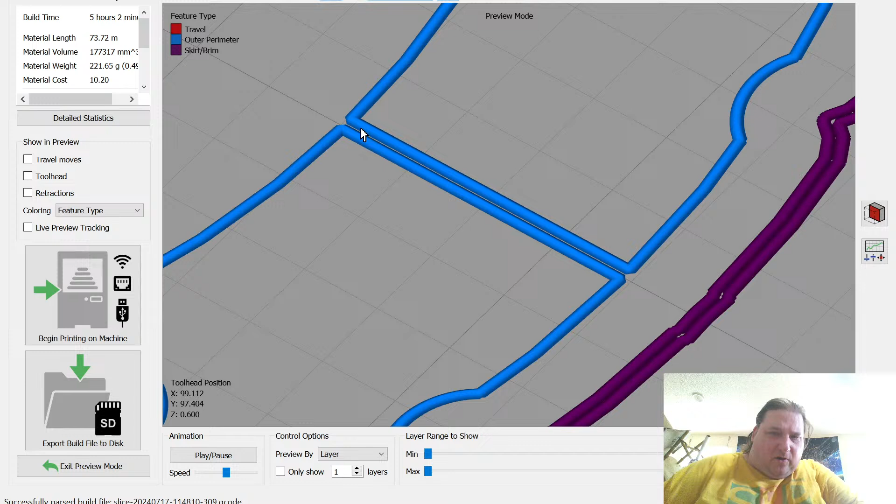Correct. So you can see here, here's my through. Now in the other one, there's a diamond here. And that means instead of all of this surface area bonding, I only had a little tiny bit here and a little tiny bit here. And the result of that is it breaks open like that, which you don't want. So the solution is to put the line in between two diamonds.

Now, the important one is your ribs. Okay, so this is your outer wall, this is your inner wall, and then this is one of the ribs that comes out and attaches. The reason the gaps are critical is because the slicer has to do this. Okay, do you see what it's doing? You're drawing this line here, and then this rib is actually 3 lines. You have the line coming down, the line going across, and then the line going up.

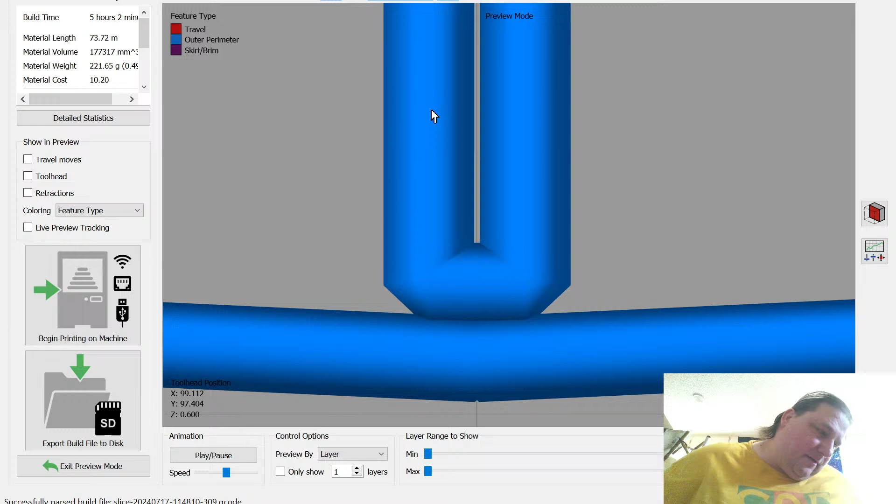You can, but you don't want to do that. That's a one-time solution, and it's a 7-hour print, and you got to test it each time you tweak it like that. And the problem is now, if that part has to mate with another part, well, by adjusting the flow rate, you're essentially adjusting how thick the model is.

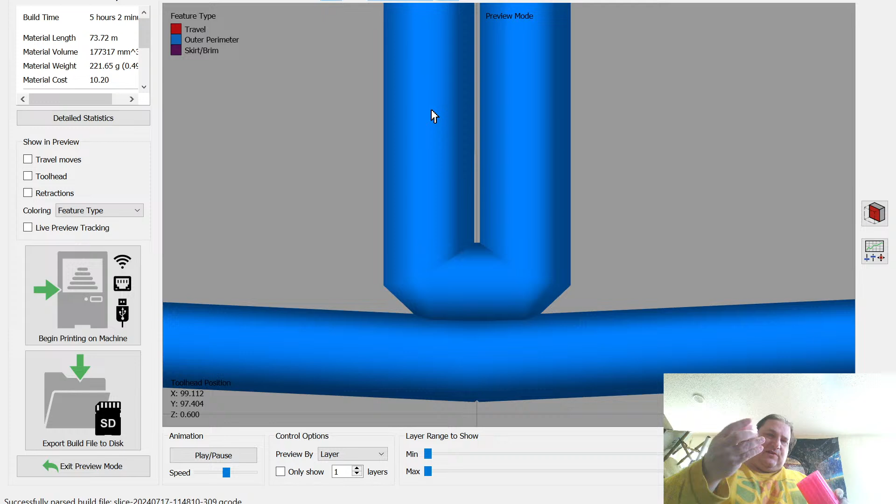If I were to adjust this by simply adjusting the flow rate, if I were to then go to try to insert a part, that part might no longer fit because I made this part thicker, which means now I have to adjust this part too. So it's better to design it correctly to not have that problem, so that you don't have to change your scaling when you go to fit your parts together, because otherwise your parts won't fit together anymore.

Now for parts like this where I'm not screwing them together, they're just going to have a sleeve holding them together, you could probably adjust 5% and get away with it, maybe. But that's not going to make as much of a difference as you think. I mean, what's 5% of 0.4? It's not very much. No, the default, well, it depends, okay?

So my default gap in here is 0.02 because it draws from this point out. So this gap doesn't actually matter. The reason I make it 0.02 is so that if I scale it a little bit, it never goes below 0.01, because if you go below 0.01, sometimes the slicers and Tinkercad do weird things. So this gap doesn't really matter. This gap should be basically 0.

Now this gap here, the gap I create here, let me show you what that actually looks like. Will that stay? I hope that stays. Yes, it does. But how do I show you the model? There is a way to do that. View. I guess I'll show it to you there. Hang on.

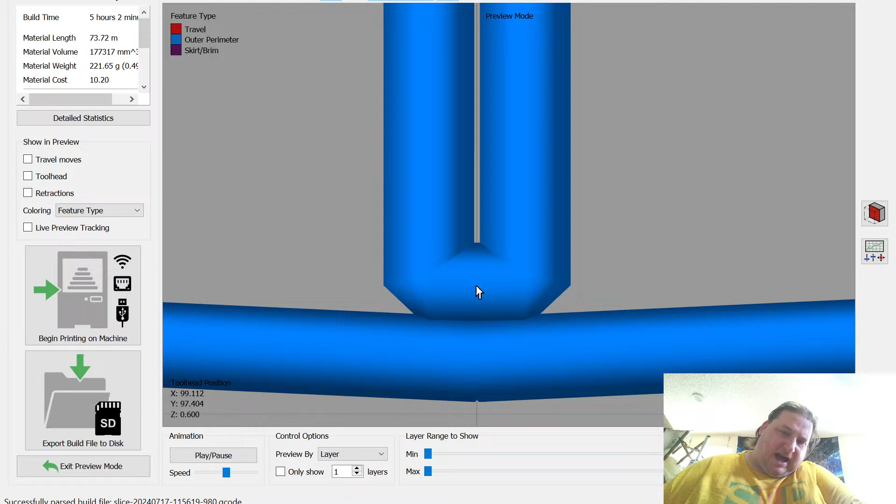The gap is 2 times your nozzle diameter. It's not a size, it's a relationship. This gap that you design into the model must be 2 times the nozzle diameter. So if you're going to print this with a 0.4 nozzle, that gap needs to be 0.8 millimeters. There is a little bit of wiggle room, so I usually use 0.75 millimeters, which encourages a little bit of better fusion. But any more than that, you start to run into problems.

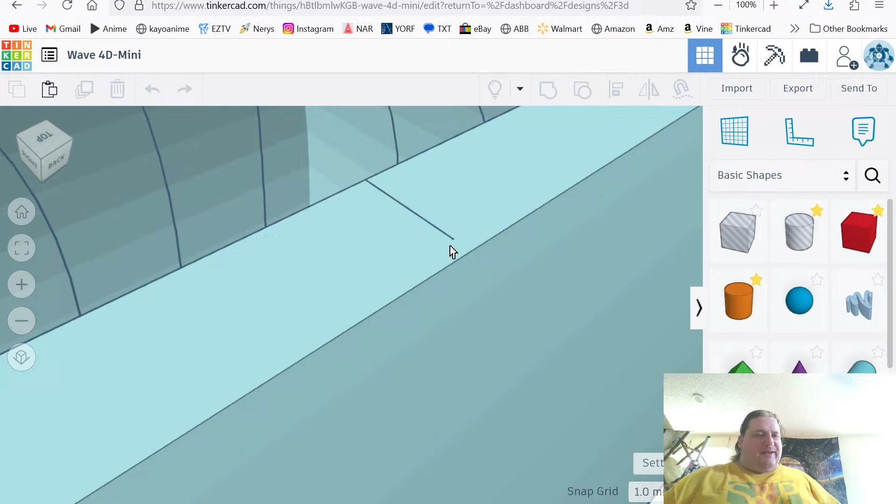What are the problems you run into? Well, that's actually not a design problem. It's a slicer problem. You need to create a valid tool path. This is a CNC machine. You have a tool head, and you have XY coordinates, and this slicer has to come up with a path for that tool head to follow in order to do what it has to do. This is what you're seeing here. This is the tool path.

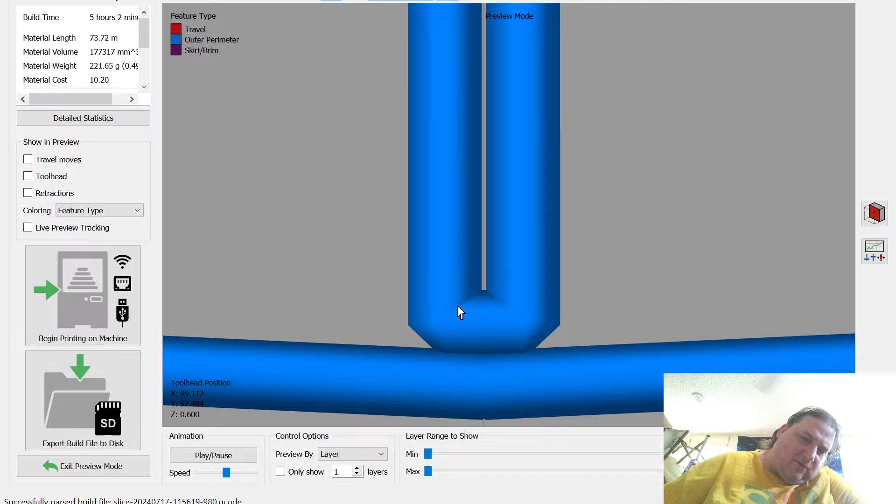Now the problem is, if this touches this, the slicer is going to interpret that as a cut. And so instead of getting a rib with an outer wall fused to it, you end up with this. And the problem is, you can only have one of these on the model if you want vase mode. If you want to maintain the advantages of vase mode, you can only have one of these on the entire model.

So if your slicer interprets this as a cut instead of a rib, then you're going to have another break in the model right here. And now vase mode is broken. It's going to have to stop, move, retract and draw 2 separate sections, which we're trying to avoid. To avoid that, this gap here has to be large enough to allow a valid tool path, yet small enough to encourage fusion of the plastic between the rib and the outer wall.

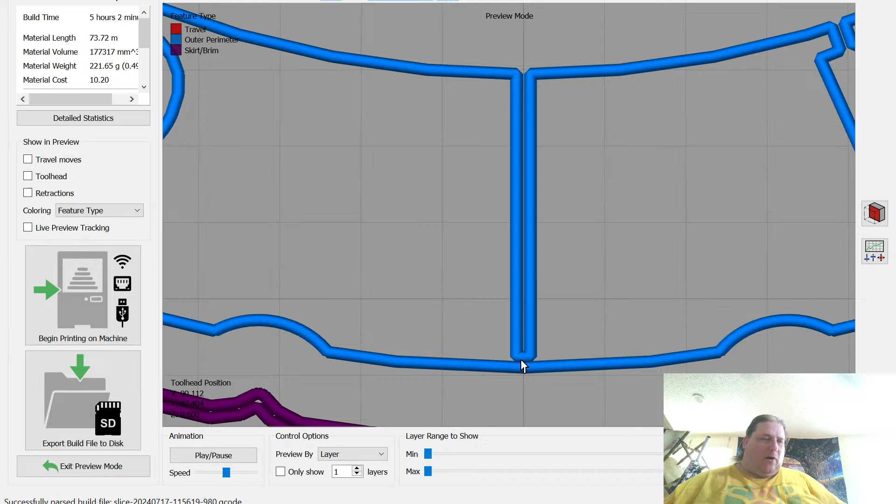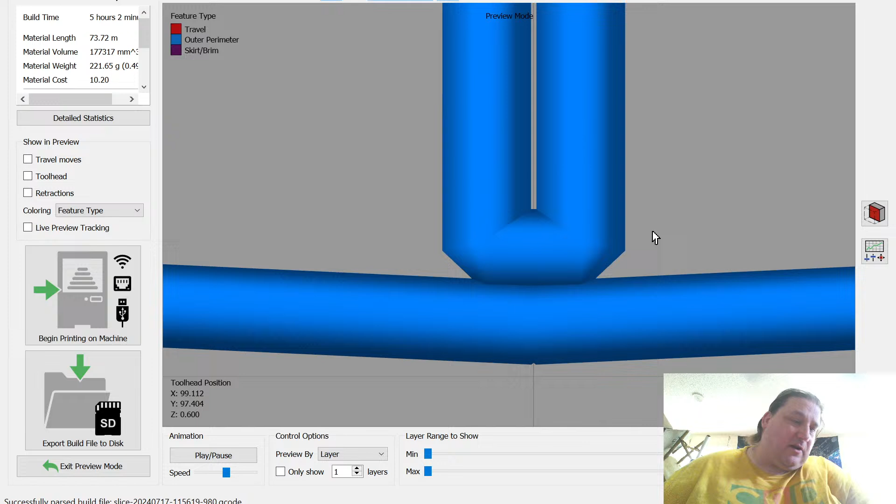The minimum, with a little bit of wiggle room, because your slicer is slightly flexible. It will say, okay, I'll allow a little bit. So usually 0.75 is enough. But basically, this needs to be 2 times the nozzle diameter. Why does it need to be 2 times the nozzle diameter? Well, it's physics. 2 objects can't occupy the same space at the same time.

So it's not a line touching a wall. That's not what you have here. What you have here is a rib touching a wall. Okay, the rib is not a line. It's a tool path. So if the nozzle goes out, the nozzle has to come back. It can't just jump from here to here. You can, but now you're not in vase mode anymore, and you lose all the advantages.

So for a valid tool path, your rib is actually 3 paths. The out path, the turn sideways path, and the return path. And that's what you're seeing here. Let me switch back to this screen. It comes down here, it moves over a minuscule distance, and then it moves up. Now, the outside of the model is this edge right here. The end of the gap that I cut into the model is this edge right here.

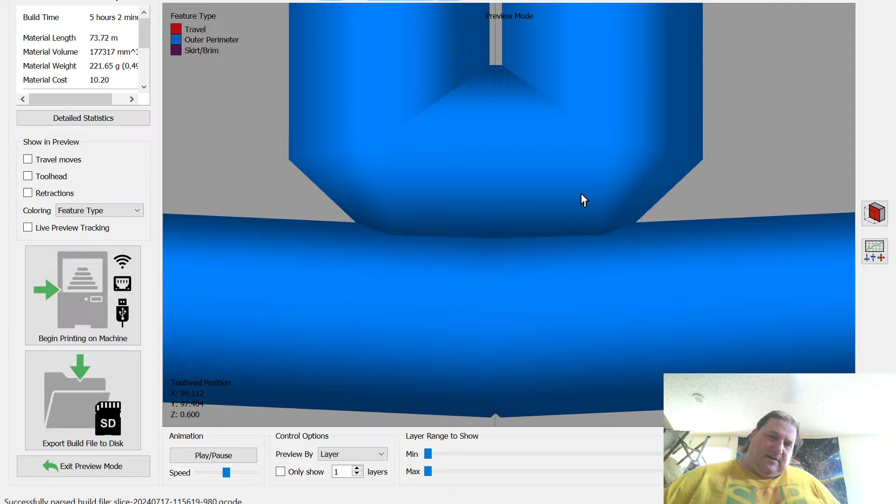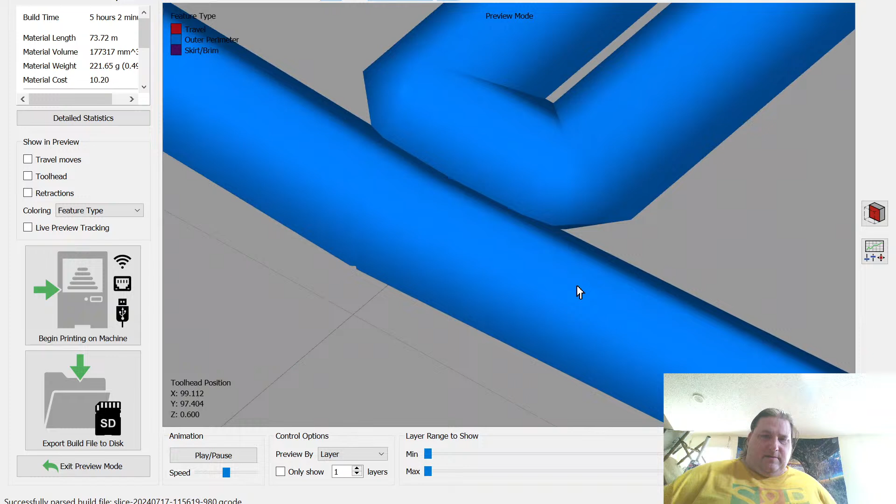If you look at this, you'll see why the distance between this point and this point has to be 0.8 millimeters. Why? Because this extrusion is 0.4 millimeters, and this extrusion is 0.4 millimeters. 0.4 plus 0.4 is 0.8. Now you can see I have a slight overlap here. This is actually embedding slightly into that, and that's because I made my gap 0.75.

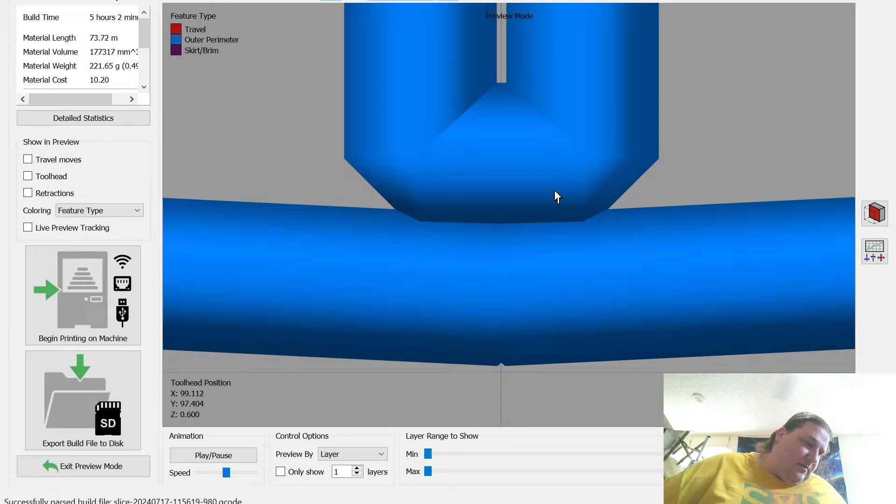The slicer will permit a certain amount of overlap. But if I were to make this 0.5, the slicer would say, okay, that's a cut, and it would extend this line all the way through the model, and you'd have two separate pieces printing here. So I have to be big enough to permit these two objects to physically exist, and small enough that they touch each other so I get fusion. That's why whenever somebody downloads one of my rockets, the first thing they have to do is a test print. Correct. That's what I do.

Now, how to do that in Fusion? I guess in Fusion, you would just make your spacing 0.02 since you're not actually cutting. In Fusion, you're building. You're drawing a blueprint. And I don't know how to do this in Fusion. I could do it as a one-off, but I don't know how to do it parametrically. What would be neat is if I could tell Fusion that I want this line here to be conformal, to follow the shape of the outer wall.

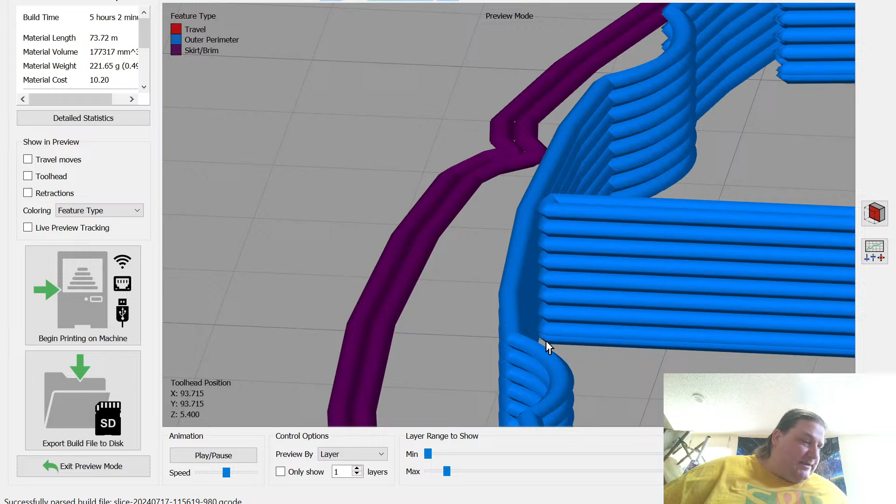That's not the same thing. Thin wall equals 0.02 is not the same thing. Thin wall equals 0.02 is the thickness of this wall itself. This is not a wall. This is a gap. See? There's no wall there. That's a gap. I'm taking a solid object and I'm cutting a slice into it.

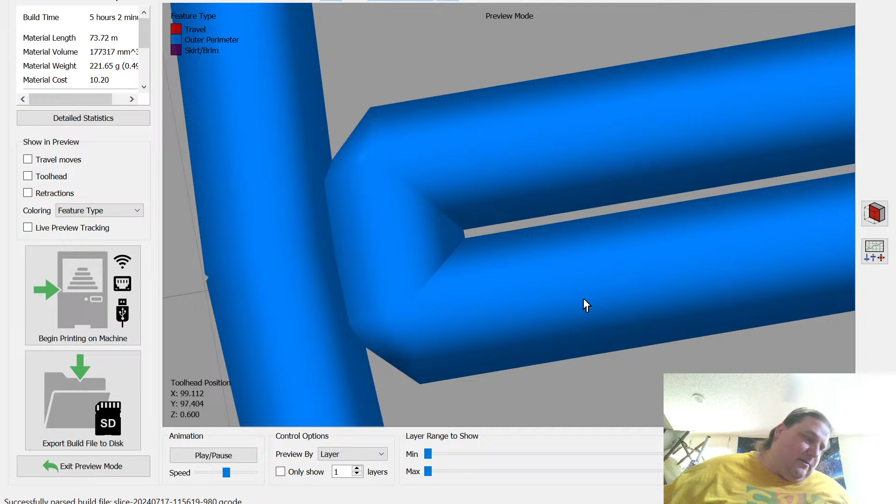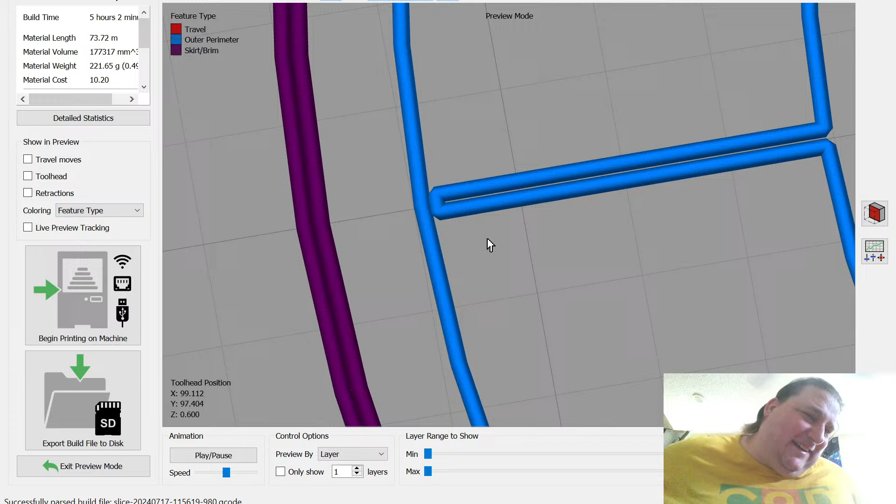Well, again, you can design that, but it's probably not going to work because your slicer is going to flip its shit. Your slicer is not going to print a 0.02 wall. It's just not. It's going to erase that. Anything you make that's 0.02 thick, the slicer is just going to delete as a defect. At least as far as I know. You could try it. I don't know how it's going to work.

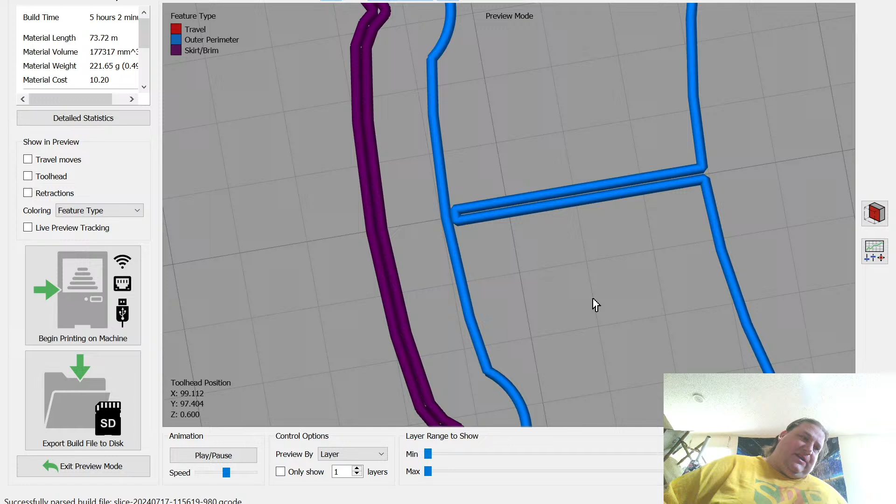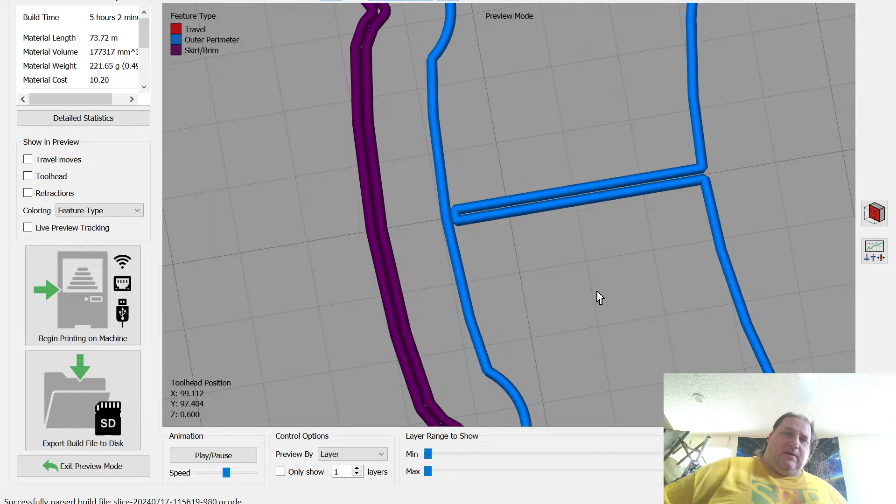Dimensioning is also going to be difficult because you're defining a wall that cannot be printed. You can force the printer to print it, but it's not possible. You're printing something that's impossible. You can't print a 0.02 wall. It's going to come out something much larger than 0.02 because that's the plastic coming out of the nozzle. Even with a 0.1 millimeter nozzle, you'd have a tough time extruding 20% flow rate, 10% flow rate, which is what you'd have to do to get a 0.02 wall.

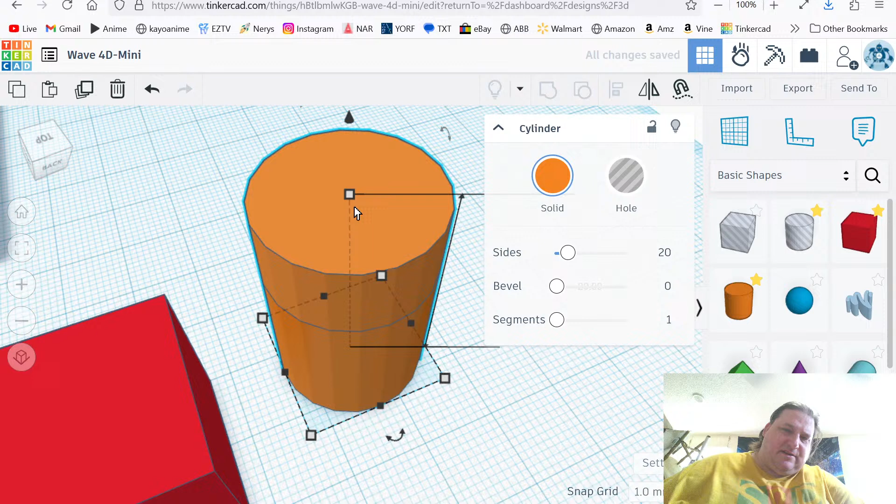You got to remember, Fusion works from the ground up. You're building the model like a blueprint, and then you're using that blueprint to construct the model. Tinkercad is the opposite. You are taking physical objects and you are adding and subtracting from those physical objects. So if I want to put a hole in the middle of the cylinder, well, in Fusion, you would draw the outer wall section and then rotate that wall. In Tinkercad, that's not what I do. I would select this object, shrink it, turn it into a hole, and then join the two together.

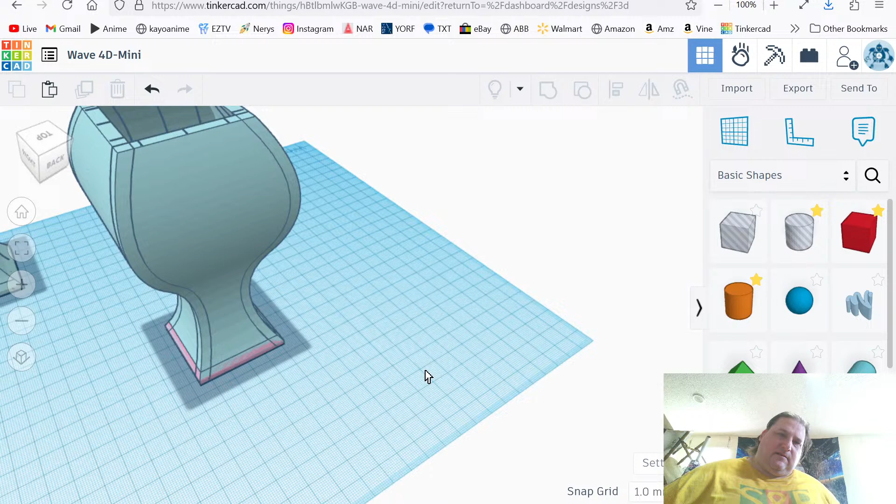So Tinkercad is more like modeling. Fusion is more like CAD. And so the way you think about that is important in your design. See, I don't even know how I would do this in Fusion while sticking with blueprints so that you retain parametricity. I just don't know how to do that. I'm not skilled enough in Fusion to know how to do that.

What I do know is the end result you need to have is this gap needs to be 2 times the nozzle diameter. Otherwise, in the slicer, you'll run into one of two problems. Either you won't have a valid tool path because this will break through this, or you'll have a perfectly valid tool path, but these won't fuse together. And if they don't fuse together, you end up with a weak part. You don't get the structural integrity boost of having an integrated structure.

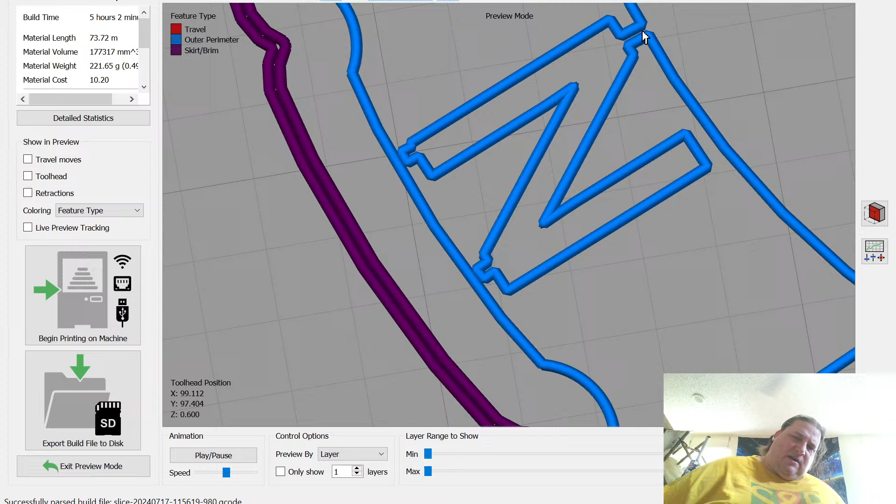And you see the letters are just extensions of a slot. The slot starts here, and then I just change it into a letter. But the same thing, down here, a little rib comes within 0.75, and then down here again, a little rib comes within 0.75, and you just end up back here. What I really should do is this should have another rib going this way, 0.75, but that's a lot harder to do. I'd have to put a cut in here, make that cut even with this wall, and then move it 0.75 to get that same result.

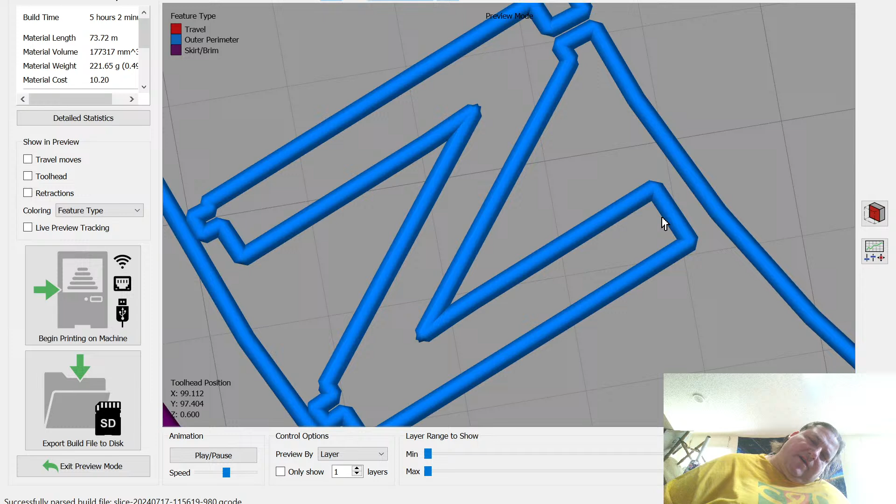The other thing I could do is I could put a slice right through the middle of the N here, making these two separate parts, and then just break through here, print this part, break through here, print this part. I could do that too. The rest of the letters didn't require that.

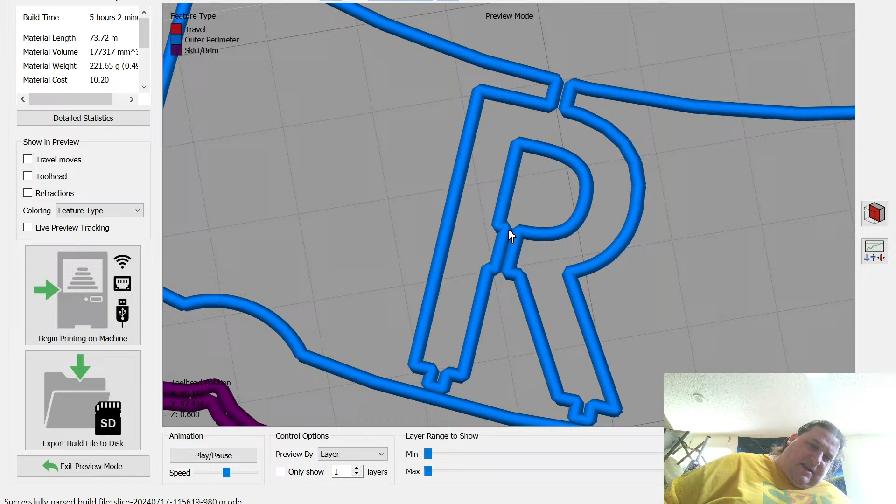The R was pretty simple. But again, I had to put a cut through here because otherwise the R is 2 components. This component and this component. You can't have that in Vase mode. They have to be connected. So I had to put a slice through here so that now this R is all one piece. Same thing with the A. You have 1 component, 2 components. You can't do that in Vase mode.

I'm not sure. As far as Cura, I abandoned Cura for my Vase mode models because I have never once been able to successfully slice in Cura with these complex Vase mode models. It just decimates them every time. It destroys them. If you want to try, if you go to my printables page, you'll see the rocket that I have there. It uses this trick.

If you can make it properly slice in Cura. No retractions, no travel movements. 1 continuous Vase mode extrusion. I have been completely unsuccessful in convincing Cura to do that. So far, it's either Simplify 3D or Prusa Slicer.

So same thing here. I had to put a little slot so that instead of being 2 triangles, it was 1 big shape. And so you can see it creates a continuous tool path. You come in here, you form your letter, and then you come out here. So it never has to stop. There's no breaks. There's no separations.

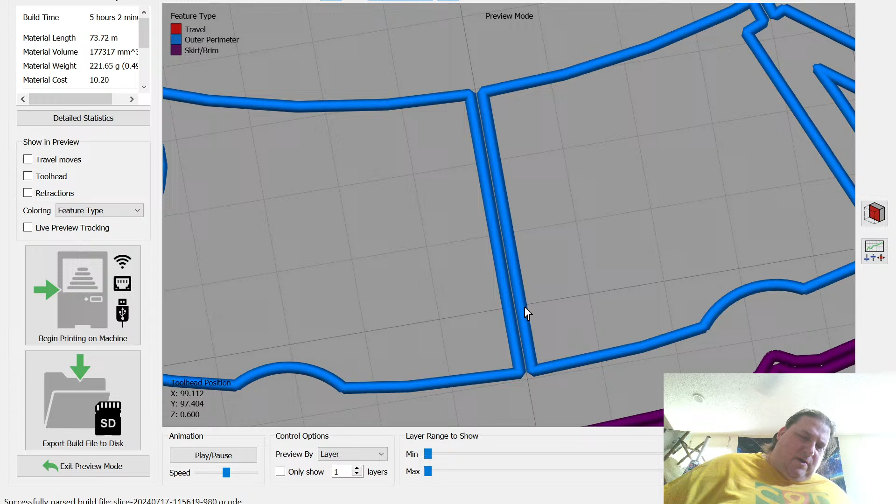The only break between the inside and the outside is this one right here. So this one here goes all the way through because you have to have some way of connecting the inside to the outside. But every other one stops. It's just a rib. All the rest of these are just ribs.

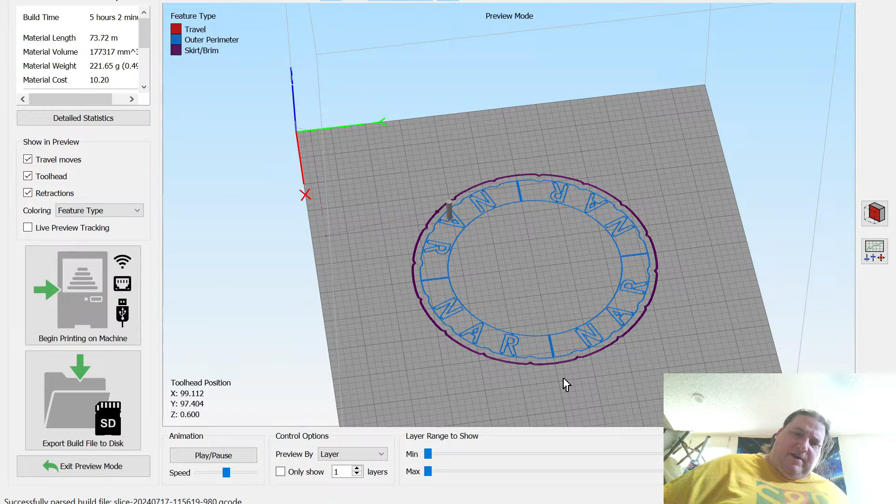Now one easy way to check it, because sometimes these slicers do weird things. Make sure you can see the tool head retractions and travel moves. And what you do is you just run through the model. You just watch that tool head, make sure it doesn't move. If that tool head ever moves, that indicates a problem, and I do have a problem here. Did that happen? See? I got a gap here.

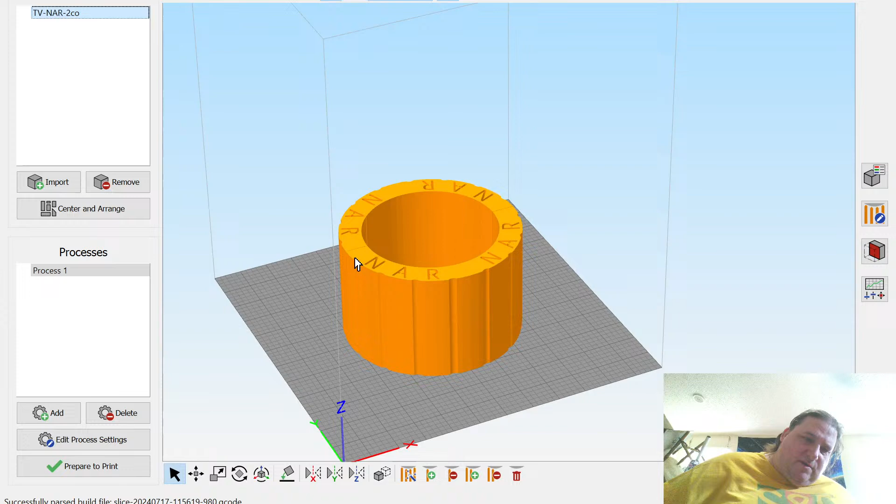This sometimes happens. The slicer does weird things, and I don't know why it does it. It jumps up one. I don't know why it does that. It didn't travel move. It just jumped up one for some reason. Sometimes it's as simple as messing with the model. So rotate a little bit. And sometimes that'll do it. Yeah, there it goes. That fixed it. Don't ask me why. There's no rhyme or reason.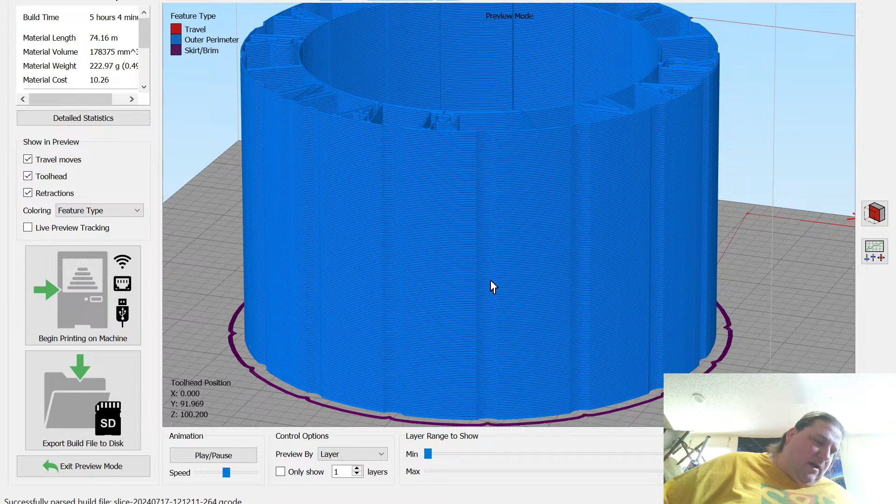Basically, there's a glitch in the slicing algorithm for vase mode, and they all have the same problem. That same glitch will appear in Prusa. The same glitch will appear in Cura. So they're all using the same algorithm. Yes, actually, I did that. Hang on, you'll like this. That's one of the things that I did to increase strength.

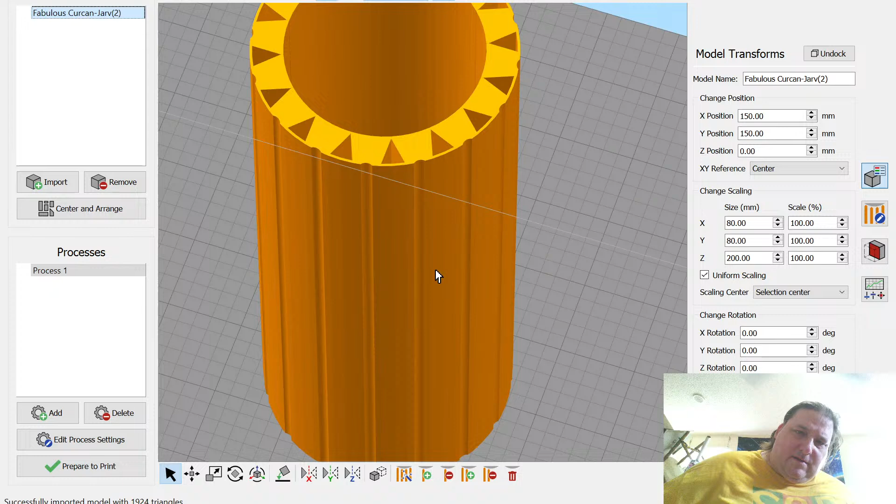Let's see. I think it's this one. Yep. So that's exactly what I did with this one here. Oh, that completely broke it. Wow. That just puked and said, nope. Oh, 1 millimeter. Oh, wow. That's why it wasn't working right. Okay. Derp. There we go. Good.

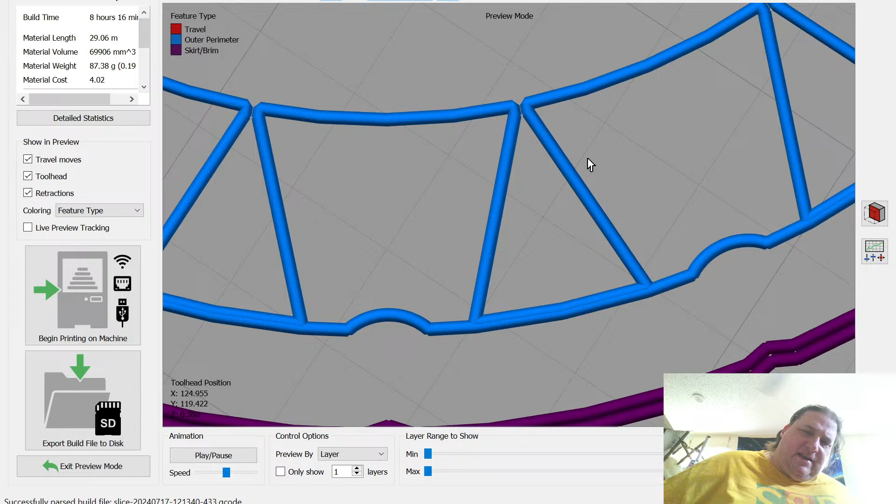So that's exactly what I did on this model here. The triangle is actually shaped the same as the cylinder. I used a cut to shape the triangle the same as the cylinder. And I did that so that I would have this really good, serious bond right here. Now, I also realized that I need to modify this. This is too small. That's going to crack open. And I don't want that.

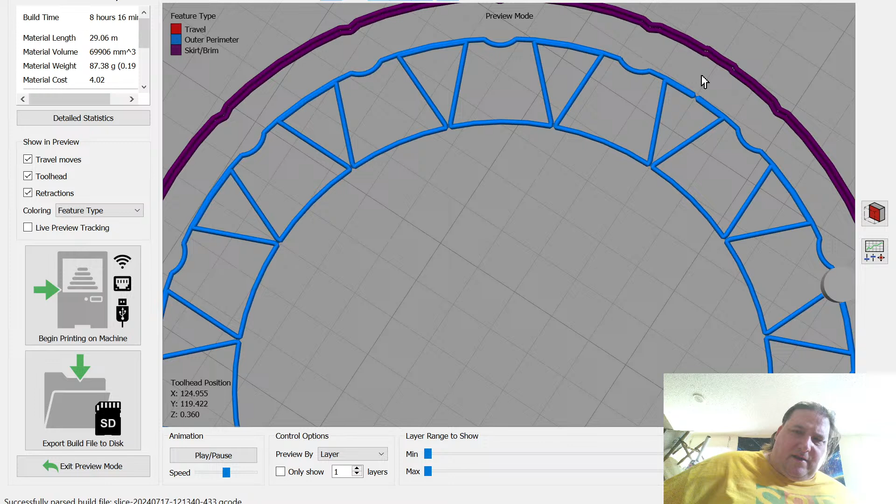Where's my pass-through? Did I not do a pass-through? I mean, this may be a screwed up one where I didn't do a pass-through. There it is. See, that's no bueno. That's not going to work. See, all the bonding is right there and right there. That's just not going to work. So there's two ways I can fix that. Well, first, I can't fix that here. The only way to fix that is I have to move this cut-through rib over to here. So I have a normal rib.

This will always fail. This is going to fail just like this. It's just going to do this. There's just not enough material. It's like, instead of having this as the bond, I have this as the bond. Like that. And that's just going to pull apart. So the solution to that is to put the one slot that goes all the way through in between two of the shapes. But yes, that's what I did here. I added this foot, so this triangle connects to both sides.

Now what I should really do, can I? One thing that I was thinking of doing, it's really complicated, but in theory, if I could figure it out, I only have to do it once and then I can duplicate it. So instead of having a triangle, you'd have an hourglass. This way you'd have an increased foot size on both sides, reinforcing both walls. And then on top of that, instead of it cut in the middle like this, have it be a path. So it would come in this way and would come over here and wrap around and come back and then go up and draw this.

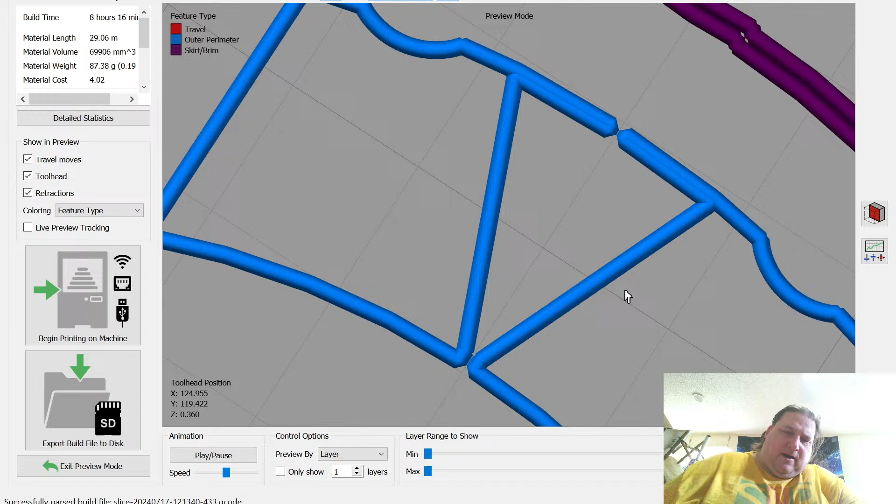That would, instead of me having a bond, oh, you couldn't even see that. So instead of having a triangle, have an hourglass, so I'd have an increased bonding foot on both sides, and then on this side, instead of having it just come in like this, have this be a complicated path that comes in here, then goes over here and comes back, and then comes up. If I did that, then you would have something more like this holding it together. So instead of having this, you'd have this, a hook. It's just designing that is really hard.

One of the reasons the walls are relatively thick on these models is because I need that path to be long enough that you actually get fusion. If that path is too short, you don't get fusion. As you can see, that one's fine, but it just pops open. You can see this one here, it popped open on the inside here too. The outside doesn't pop open because the outside's one continuous wall. It's not a bond. But the inside is just a trivial bond that connects them together. And there's just not enough surface area. There's not enough plastic touching each other.

So let's see what I can do with that. Yeah, some kind of a hook or dovetail, something to help it bond. So let's do this. It should be this. Nope. Yeah, I can start from this. It's the same model. So let's see here. Excuse me. Oh yeah, I'm trying to do something that doesn't work. Is there a reason why this is? Oh, it's catching up. Okay.

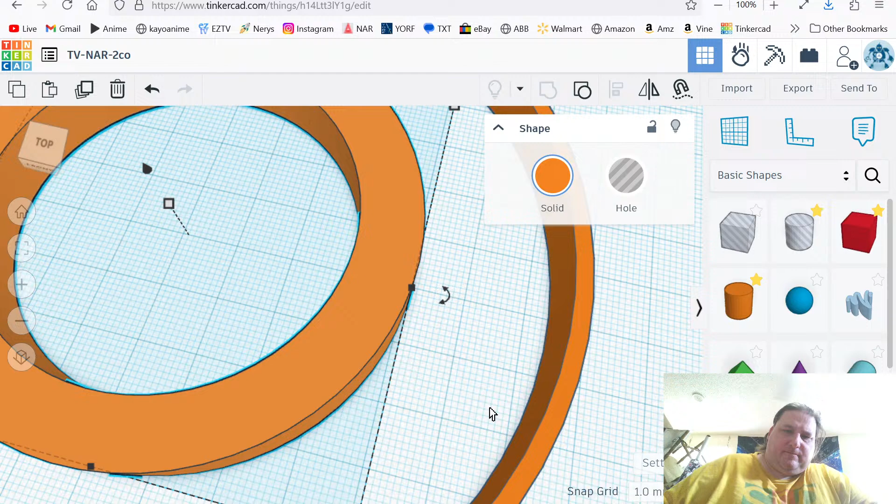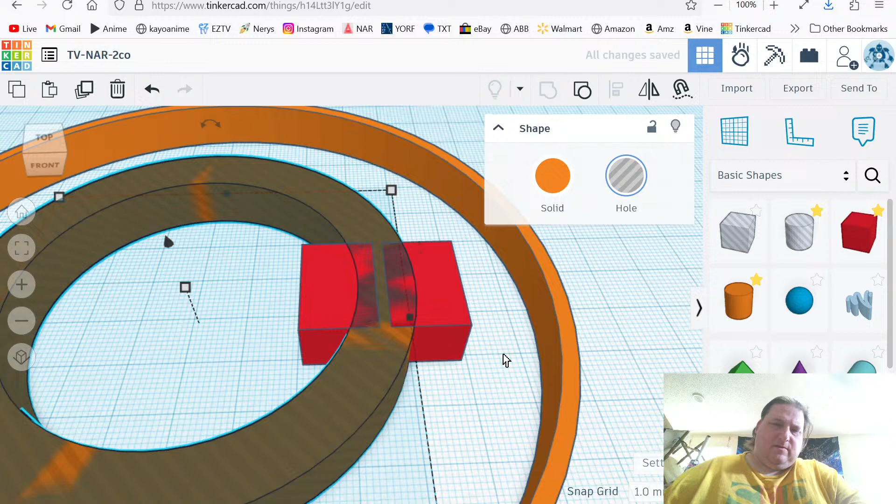Okay, so first things first, let's create our blocks. Do you have to be in the way, no matter what I do? Okay, now they're all centered. Let's take these two. Let's make sure they are properly centered. Yes, they are. Okay. So I need to Control D this, make it a hollow. Control D it again. One has to join with this one. This should not be taking very long. This is a simple operation. This one cuts this one. Good. These need to be hollow.

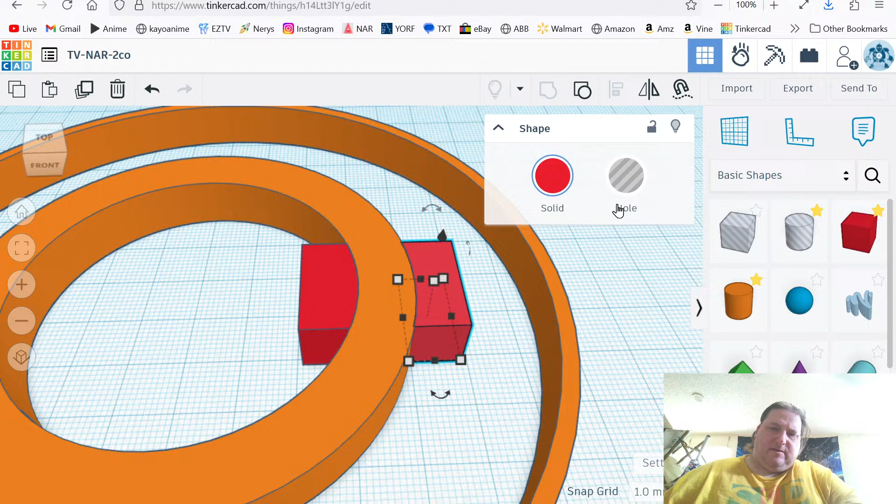This needs to be moved this way, negative 0.75. This one needs to move this way, 0.75. My cut tools are prepared. Now I need to create the object that we're going to cut. I would like it to be round, not square. So probably the easiest way is to just drop it into the square. Okay. Take that and this, align on this one. It is already centered. Okay.

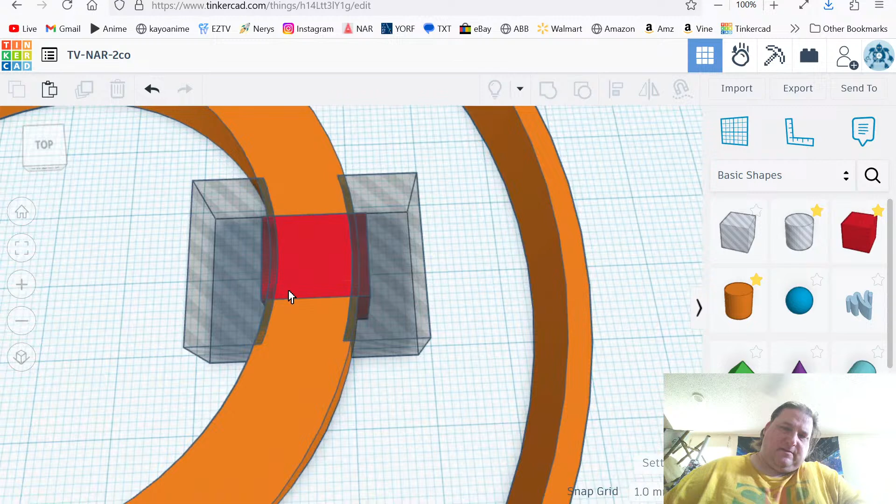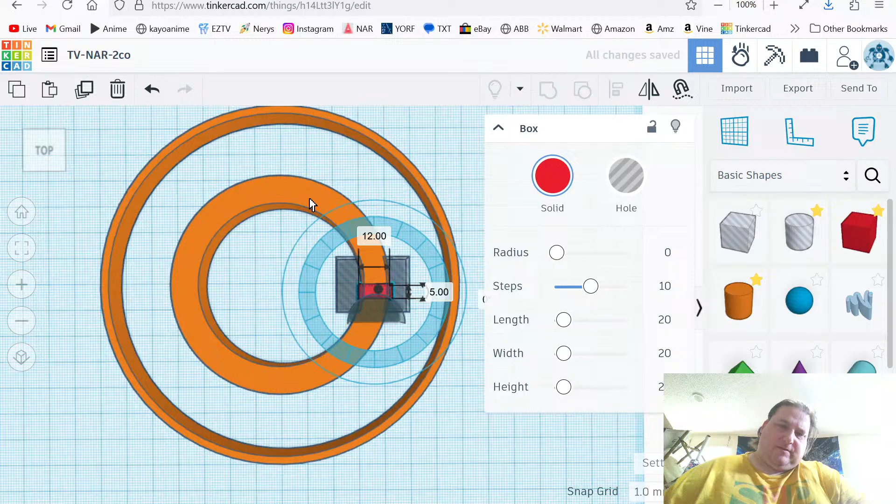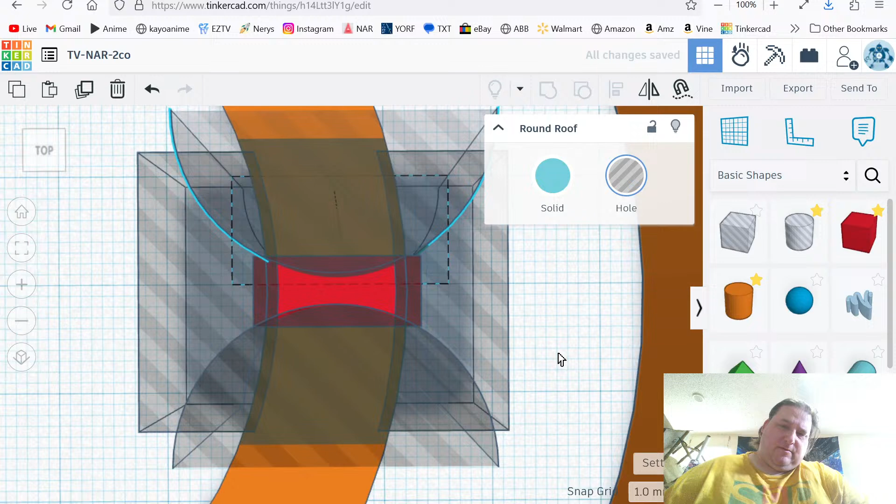Now we can take one of these and do this. That's actually a pretty good curve. So let's make this 5 millimeters. And now we have to recenter on this piece here. We can do this. Okay. Now we take this and join it as one piece. We connect it to this red one. Center on the red one. We are already centered. Okay. That should be it.

Let's hide this. This should be the new rib. Unhide. And there we go. Now we have our hourglass shaped rib. And it's conformal and properly shaped.

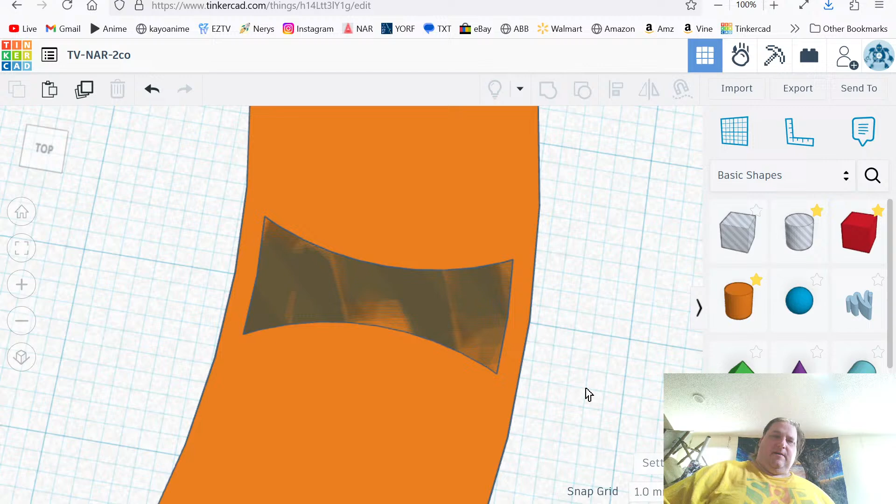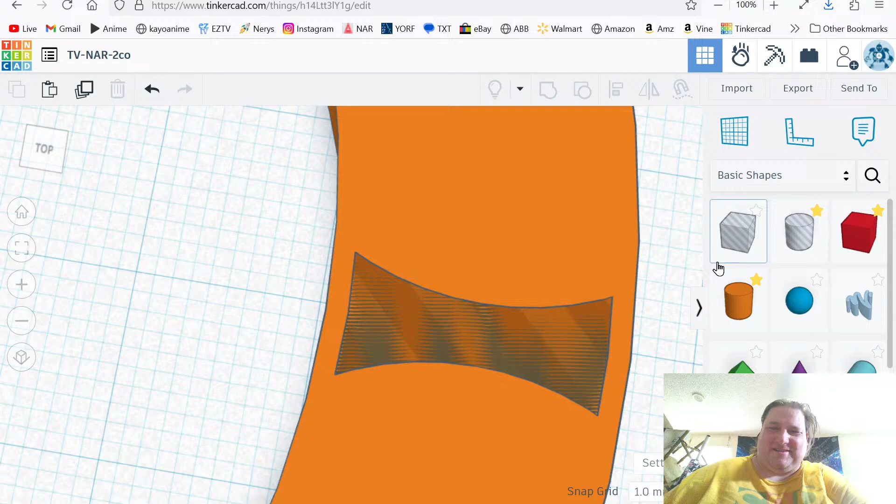You know, there is a really sneaky way that I can make this rib not have any of the gapping problems. Oh, that's sneaky. That's so sneaky. The only bad thing is it's gonna add a lot of plastic. But I can minimize that. Oh, this is so fucking sneaky. Oh, you're gonna love this. Yeah, this is gonna be great. Oh boy. No one says the rib has to be here. The rib can be freaking anywhere. Oh boy, this is gonna be sneaky.

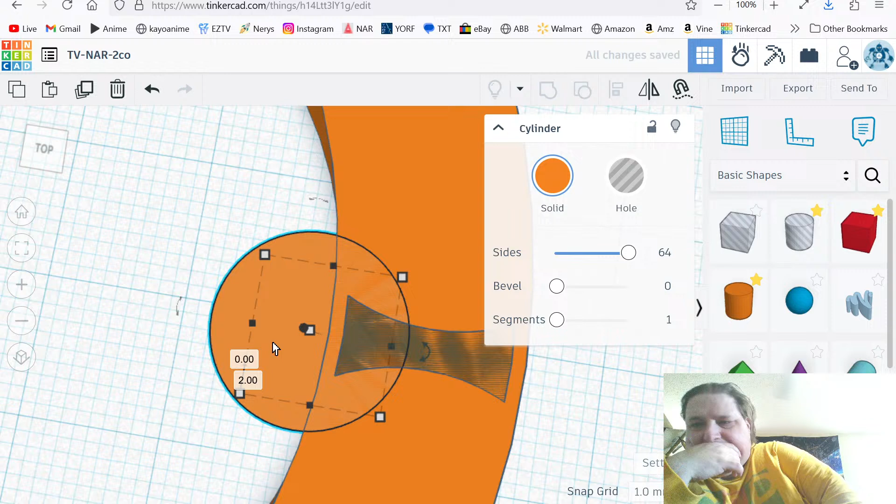Let's see, what do I want to? Let's make it 15 by 15. How does that look? Let's go 10 by 10. Yeah, I kind of dig that. Yeah. Okay, now. This only needs to be 2. This is a cut. So I should be able to Control D this, make it taller, easier to mess with. And then, so 2.

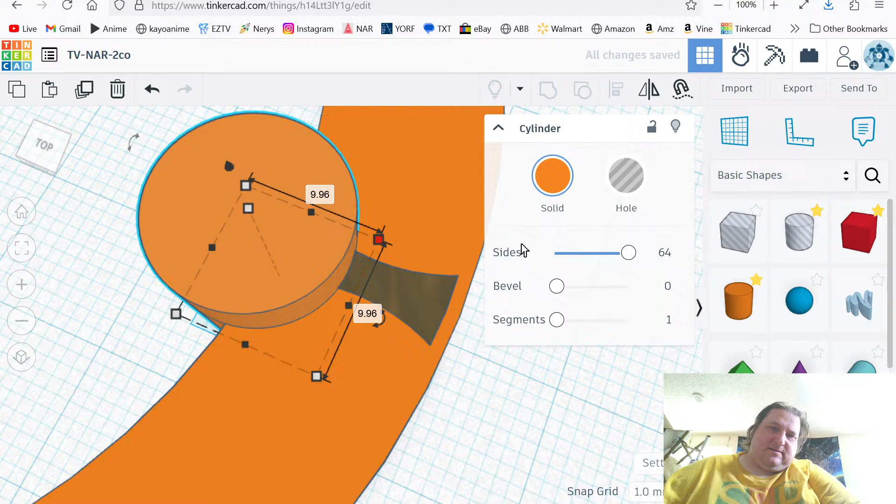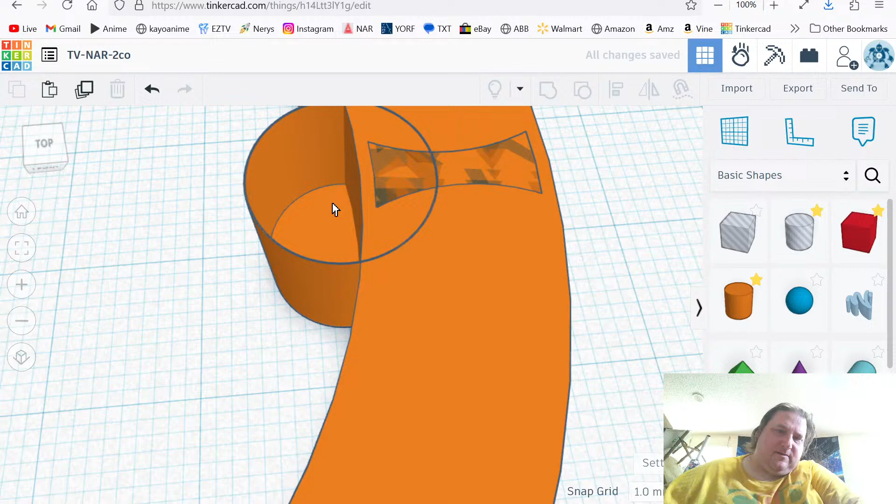Let me think. So I need 4. Because it's going to be 0.2 on each side. So 9.6. No. 9.96? 9.96. Turn that into a hole. We got to center these two. Join them. That did not work. Why didn't that work? Because I'm doing such tiny slices. That'll do it. What the fuck? Did I do a scalar difference? I do not want both of you.

There we go. Oh yeah. Do you see what I'm doing yet? Do you see what I'm doing? This is such a cheat. Oh boy, this is such a cheat. But this is gonna be good. I never thought of this before.

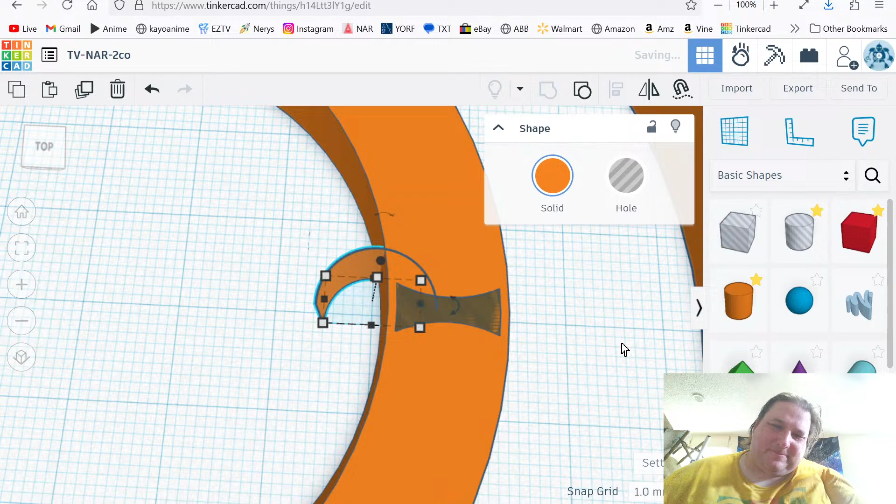So all I need to do is take that and that, cut, turn that into a hole, join it with this. There. Now the rib is an arc that comes in from off the side of the hourglass, and the hourglass will fully meld with the inside and the outside over more than 5 millimeters worth of plastic. Oh, that's evil.

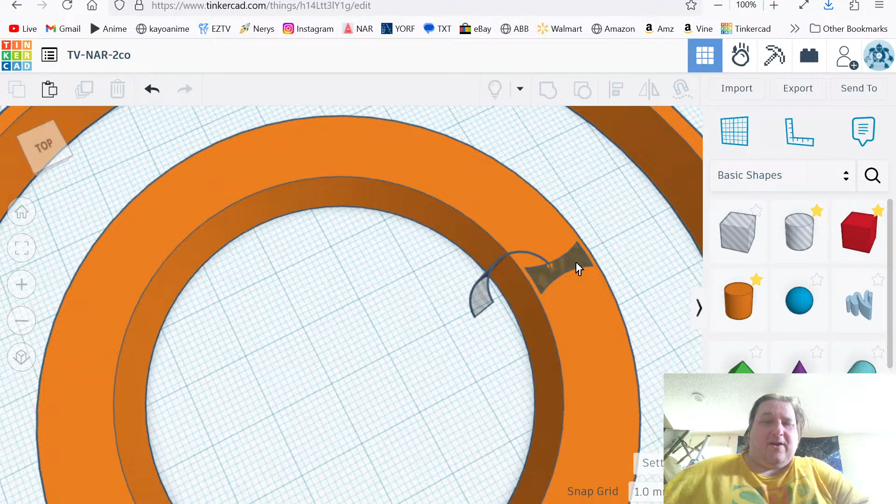And just because I'm a stinking fancy pants and I want to do it, do I go the crazy route? Why not? There's no reason not to. Let's just try it. Control D, rotate this way, and then do the same thing over here. And that'll be the connection to the outside.

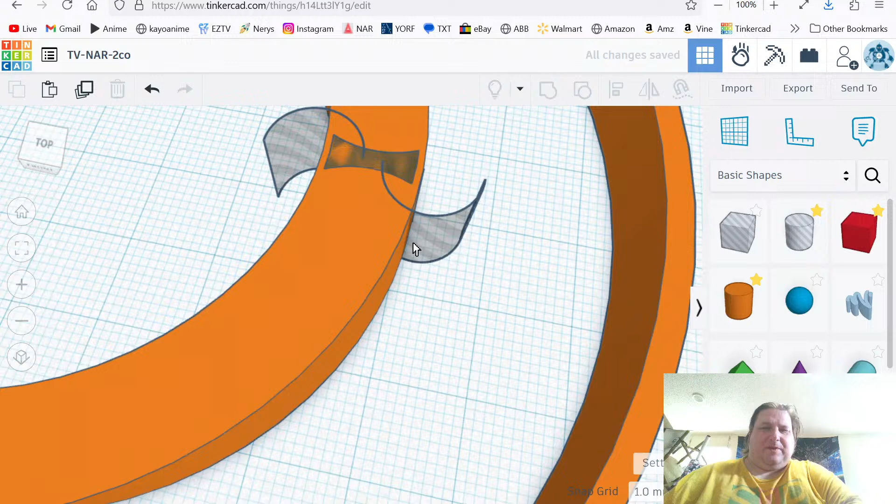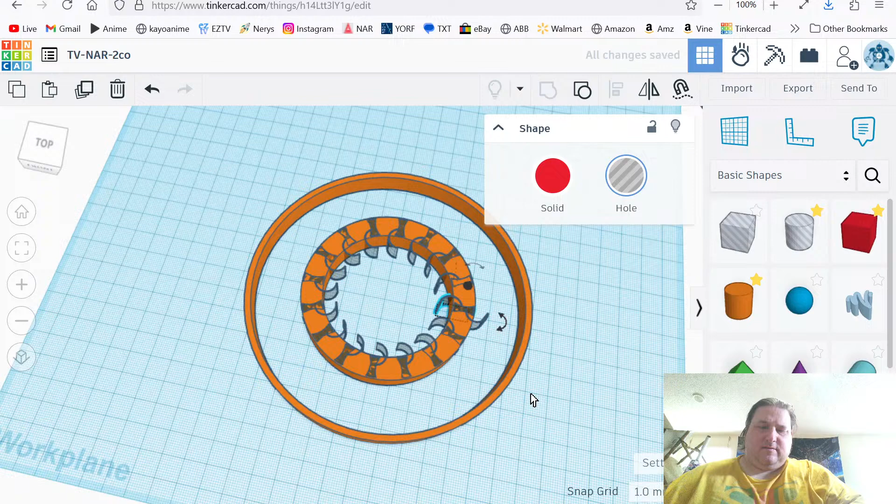So this one stays separate. This one gets joined with this one. And then we Control D this, and we start our rotation. That's just wrong. That's so cool. Oh, I need to see if this works. So let's take this, hide you, delete all of you, join all of you. Are we clean? Oh, that is so fucking cool.

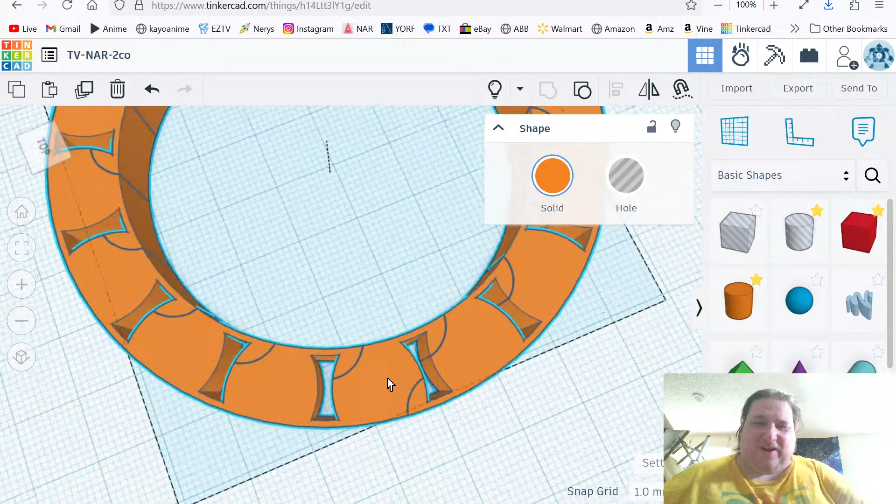Now these just don't exist anymore. These little gaps here just don't exist anymore. They're now replaced with this little arc. And then it can draw this. And it's okay if this is a weak point. The stress points are the inside and outside skin. And now the inside and outside skin are monolithic. I mean, that's going to add print time, no question. It's going to add a little bit to print time. But it looks cool as hell.

Why did you do that? Okay, that is really cool. We're going to call this one... I need a cool name for this. We're going to call it Timeless.

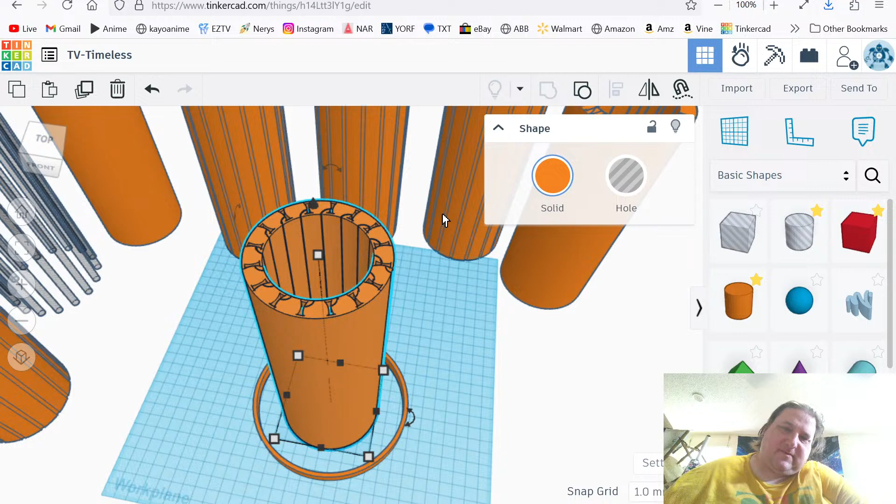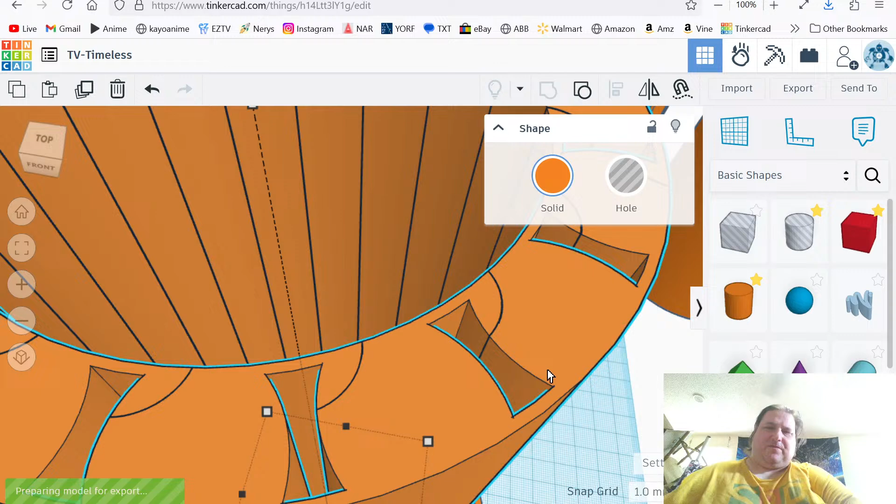Now, the only problem I might have is... No, that should be enough. Because this is the gap I need. That's out to here. That's more than enough for it to make that turn, so we're fine. Oh, that's cool. Now scaled up to 1mm size. That's going to make a strong as hell part. I mean, it's going to use a lot of plastic, but it's going to be so strong.

And my hair's all screwy again. I must be touching it or something. And like scratching at it or something.

Come on. Export the damn model. What is taking so long? Control D. Let's do the corrugation. This probably doesn't need the corrugation. I'm going to do it anyway. Oh, that's slick. That is so slick. I really hope that works. It should. I mean, all the rules are adhered to, so it should work fine.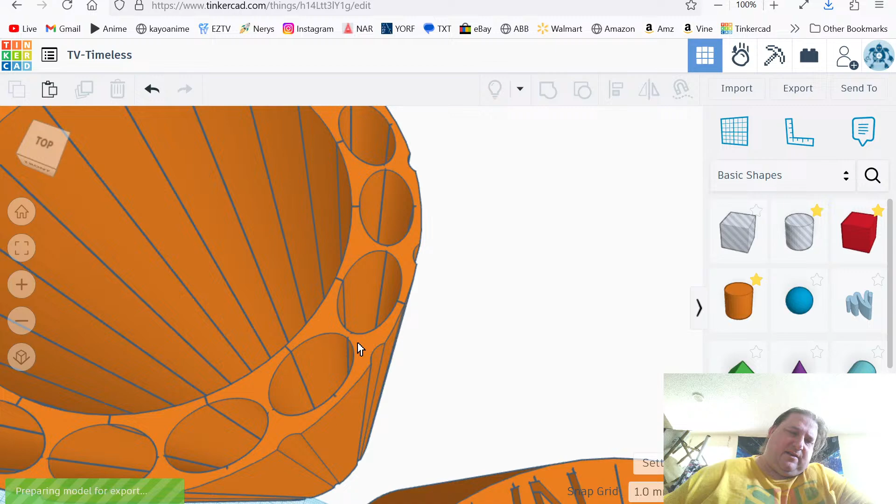I'm printing this one now, but this one I made the same mistake. I have the slot going through here, which means that's going to be a weak point. It's going to break right there. Although with this one being integrated, it'll be a little more resilient. Ah, there it goes. Now we take this and this and join them together. This will give me my corrugated outer skin, which will add just a tiny bit more strength.

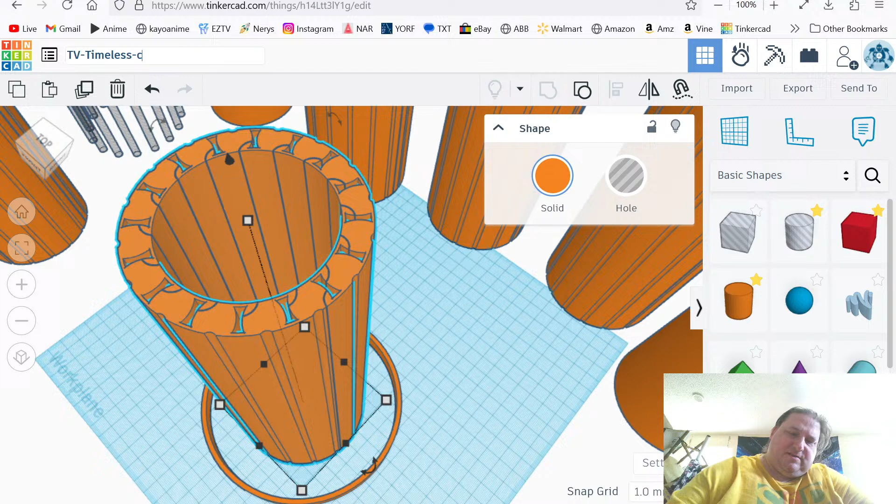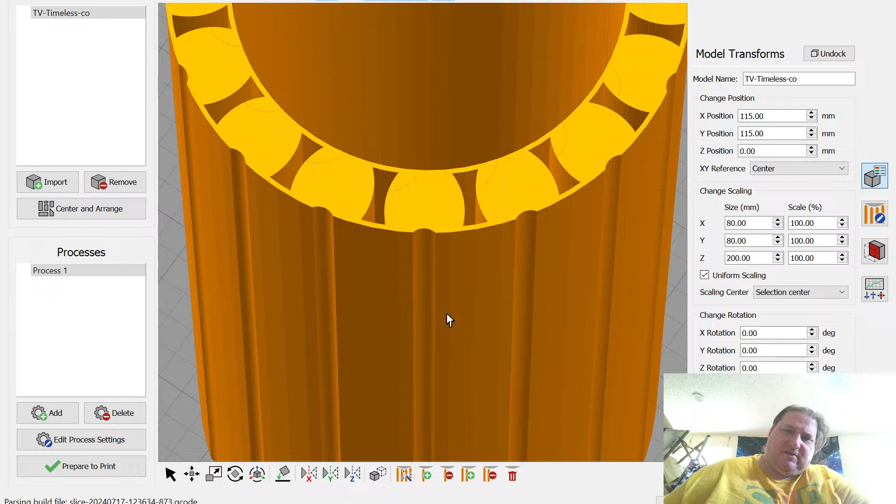There we go. So this one is Timeless-CO for corrugated. So you guys know why I call it Timeless? It's going to be so cool if this works. It should. There shouldn't be anything that would cause it to fail. Look at that. Oh, that's a work of art.

Where's my double? Uh-oh, nope, it's broken. There it is. There's the double. There's the yin-yang. That connects the inside to the outside. Then the rest are all on the inside. Oh, that's hot. Oh, man, I might just have to cancel that current one printing and get this one started.

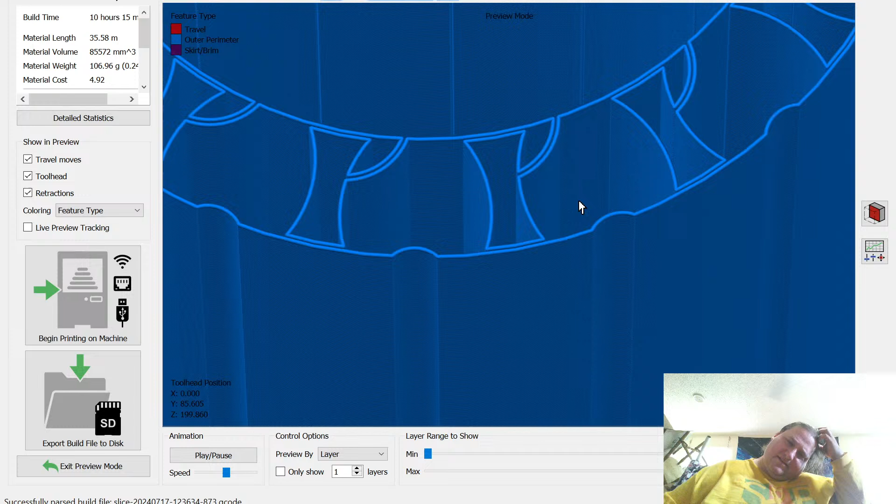And it looks beautiful. And it's not too bad on the plastic either. It's a little high. It's 106 grams, 107 grams. I'd have liked to have gotten that below 100 grams. But hey, you know, it's gonna look cool as hell and be strong as freaking hell. I could make the hourglasses a little deeper, the arc a little deeper, and that would help with the... No, it wouldn't. It would still use the same amount of material.

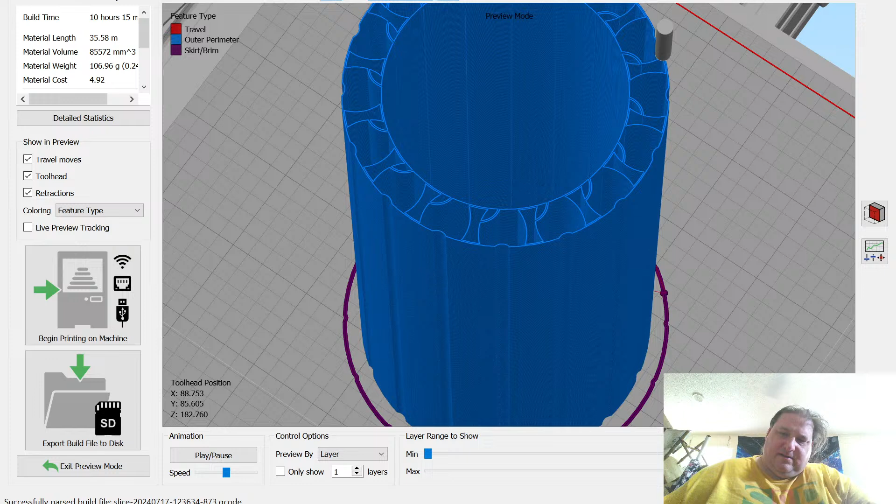Oh, very nice. Let me see, everything good. The tool head is not moving. I don't see any gaps forming. So no glitches. Damn, that looks good. This is a lot of wasted plastic right here. It's a whole lot of wasted plastic.

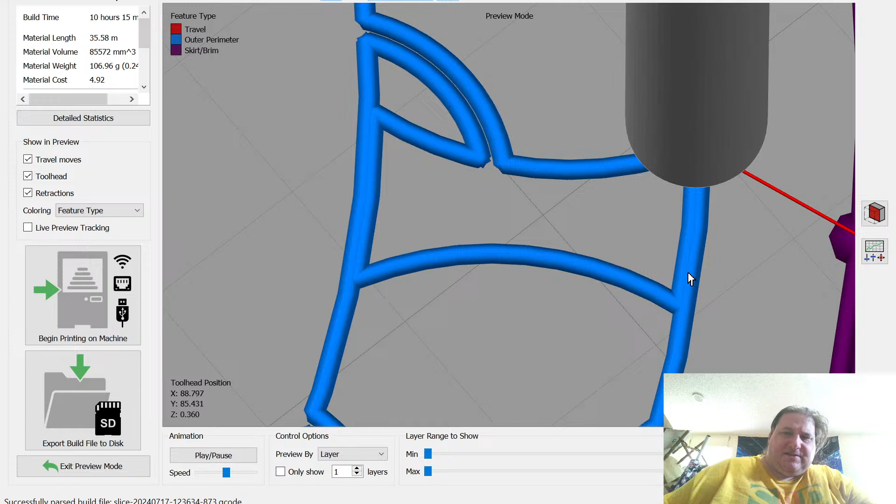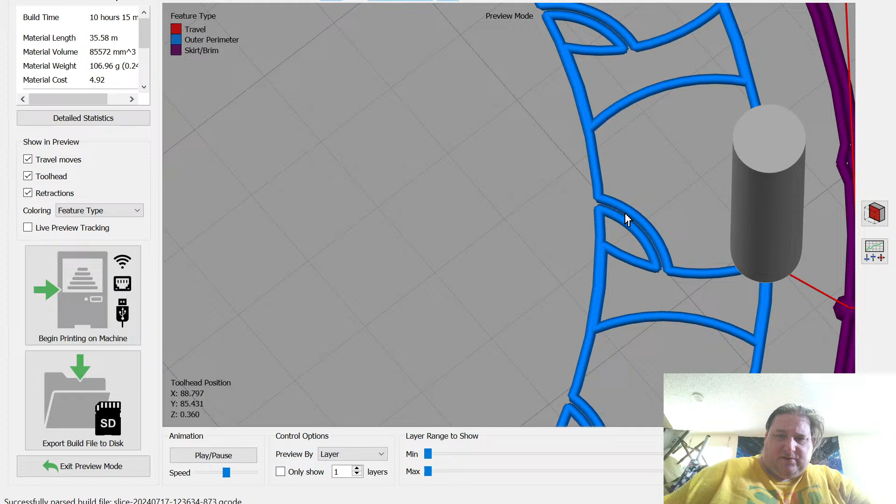Hey, Bale. Cumulatively, that adds a lot of weight right there because it's a double wall. But it means that these walls here, as you can see, are fully fused. Jesus, that's going to be strong. Now, even if one of these does crack, it won't compromise the model. And it'd be pretty hard for this to crack since this is a pretty good long curve here, smooth curve. So that should be a pretty good bond right there.

That's cool. I like that a lot. Let's get this on a memory card.

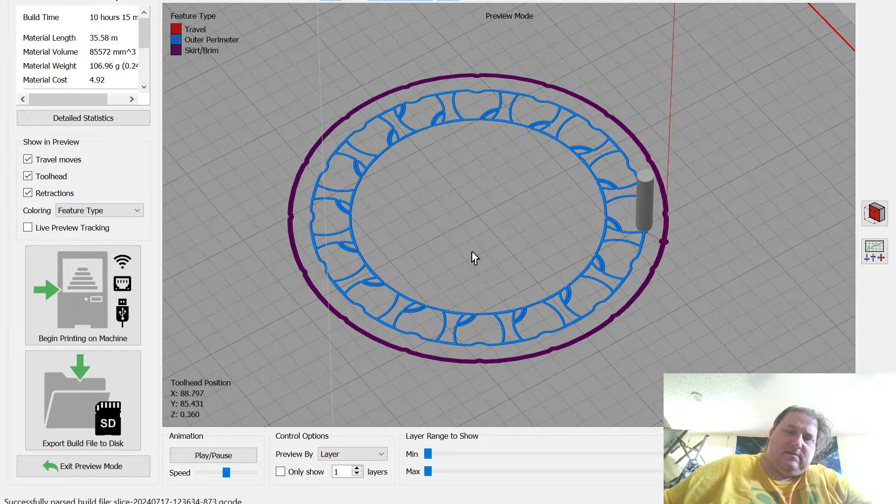Juice box. I can leave them in there. Let's just dump them here.

Okay, let's make sure my settings are good. Okay, this should not require any over extrusion. No, I'm going to leave retract. Even though it doesn't need retraction, I leave retraction on so that if it does incorrect retraction somewhere, I can see it in the preview. I just made it right now. I literally just invented the idea right now.

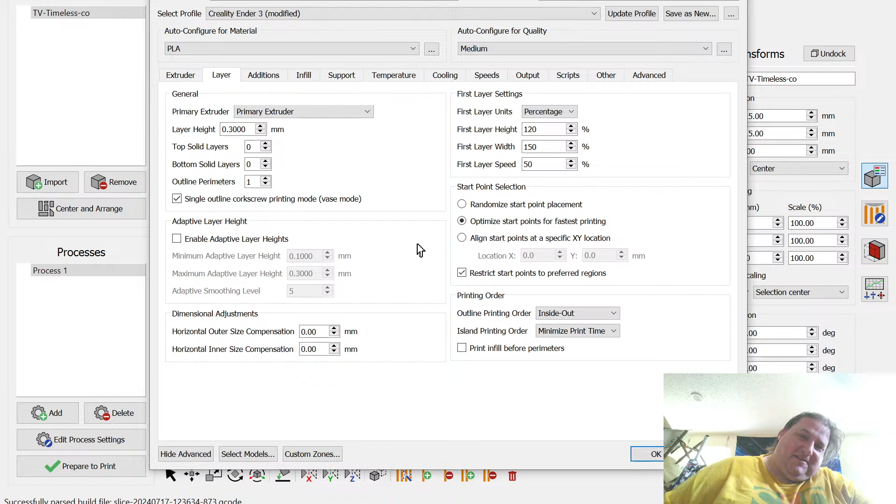I do vase mode. Like this. This is a vase mode print. Even all the letters, they're all vase mode. That's when you can read it. NAR. Association of Rocketry, not Rifle Association. And then I have other models. I do all of my models. I have a thing for vase mode. I do everything in vase mode. And I create multi-surface complex structures that use vase mode.

But one of the problems that we had is when we added those internal shapes to strengthen the part, it created a weakness. And that weakness was right there because there's just not enough plastic to bond. And so this is the latest design. Let's see here. So the way this one works is that here's your input output. So this connects the inside to the outside, and then each of these hourglasses are actually self-contained.

So the way this works is the nozzle will come this way. It'll come up here, out here, over here, around, over here, come up, come back here, and then continue. This here and this here is actually two walls. And it'll do that all the way around until it gets to this one, where instead of coming back here again, it goes to the outside. And now it draws the entire outside of the model, comes back to here, comes back inside, and then continues the inside. This way I can print this, what's basically a 4-perimeter vase mode model with structure inside for strength, and it's all vase mode compatible.

So instead of having it cut right through here, which is what I would normally do, this here would then end up being one of those little point bonds like this. So instead, I come in from the side here with an arc. And now it can draw this entire shape with no break. And that break is a very strong arc to someplace else on the inner wall. Can this still break? Yes.

But now, instead of this being a point like this, it's a line. And that line is more like this instead of this. So this should be really freaking strong. The process, I can integrate design into this that gives me incredible strength without any defects. So on the big model, you can see that big seam right there, that's the one that goes all the way through. While the rest of these ribs just go to the outside edge and touch it so they fuse.

And the result is this is not a lightweight vase. This is a very heavy vase. It's printed with a 1 millimeter nozzle and it's 2 walls. This is a very heavy part. This is like 225 grams of plastic right here. You could beat someone to death with this. But the advantages of vase mode, actually it's faster to print. Much faster to print, because it's like turning off retractions and travel moves. So it prints that much faster.

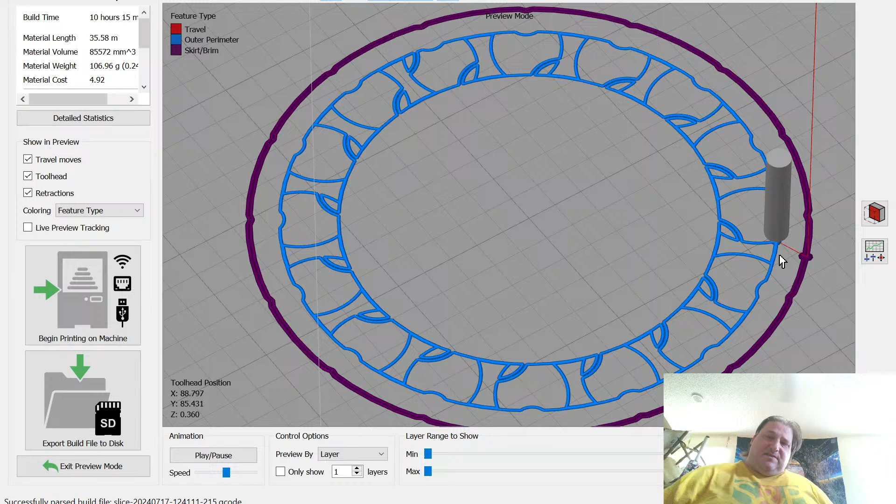And then if you do crazy things like this, where you come up with a really complex design like this, this is an engineered design, okay? So first of all, there's an actual 5mm footprint joining this inside with this outside on both sides. So this larger footprint means a very strong bond. And then the arc is a curve. Curves are stronger. They use less plastic.

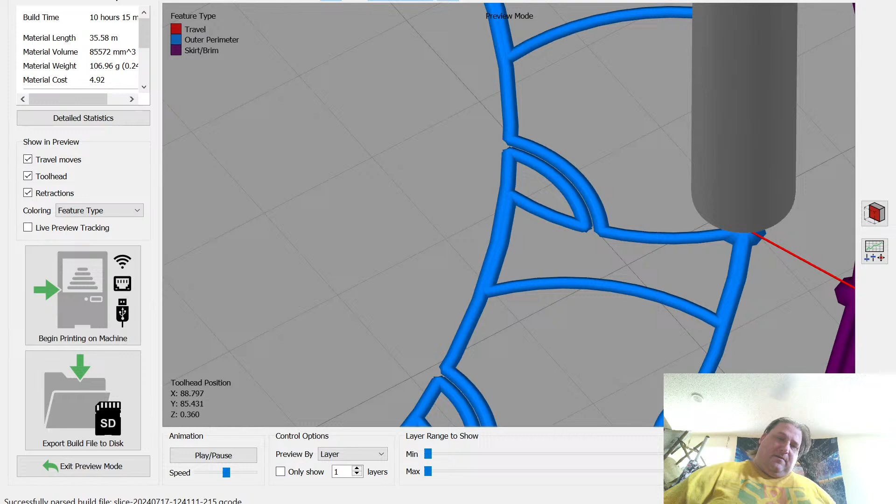And also curves act as shock absorbers. So the inner and outer wall will now be more flexible when they're compressed, so they'll be more likely to flex instead of break. And then this eliminates the soft point break problem that causes this to happen. Now I could solve that also by simply moving the pass-through in between two diamonds. That would also solve that problem. Although you would still have a problem with this inside joint going cracky when you squeezed it. But it's less likely to break.

So I get now a continuous extrusion, monolithic, engineered structural part that has no retractions and no travel movements on the printer. So it's easier to print, faster to print, stronger to print, and more resilient against errors when printing. I call that plus all around. I mean, yes, it's a pain in the ass to design these parts, but you only have to do it once. Once I design this part and it works, then I just hit print, hit print, hit print. I just keep hitting print, no big deal.

Now, of course, doing a complex print like this, I lose out on my ability to thread the parts together. You can't do that anymore. But that's okay. For these bigger models, you're not going to want to thread them together. You're going to want to glue them together so they're stronger, because then the threads become the weak point. But yeah, I'm excited to print this. This looks really cool.